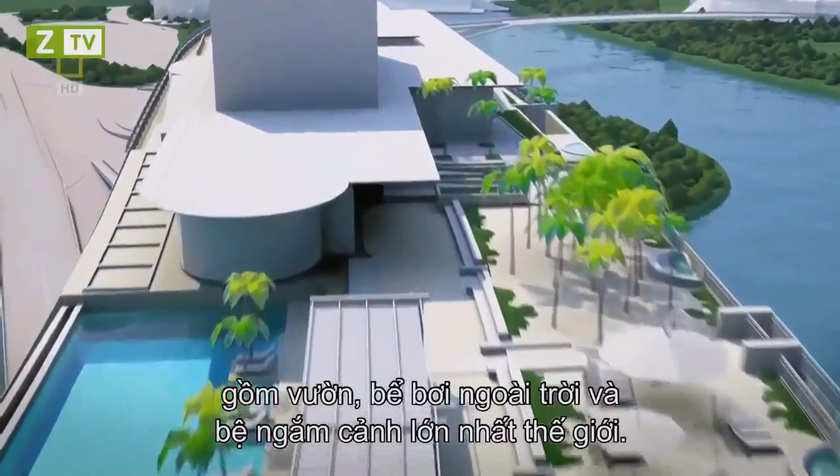A 340-meter sky park spans its length, containing gardens, outdoor pools, and the world's largest cantilevered observation deck. But how do you build something as big as an aircraft carrier, 200 meters in the air?

In the hotel's atrium, mammoth works of art have to be somehow incorporated into the architecture. Its challenging centerpiece, a 15-ton mass of steel by a renegade artist from Britain.

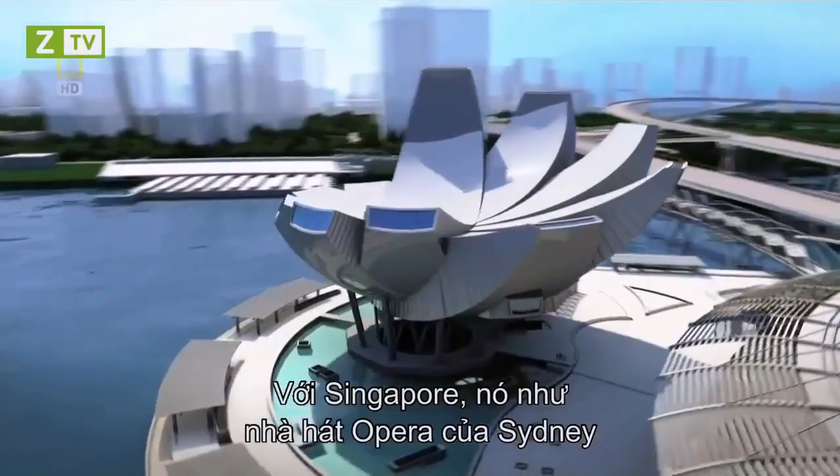A 60-meter-tall Art Science Museum is designed for maximum visual impact. It will be to Singapore what the Opera House is to Sydney. Only one problem: it seems too impractical to construct.

And a set of dramatic glass-encased pavilions, while themselves pose little challenge, have to be built in water.

The man behind the Marina Bay project understands the risks, but he believes that anything short of astounding will fail. Sheldon Adelson, one of the world's richest men and CEO of Las Vegas Sands Corporation.

What we hope to accomplish is to change the face of Singapore tourism. So we expect a very successful development. That is by far the largest and most expensive single project we've ever undertaken.

It'll cost about 5 to 5.5 billion US dollars. It's a lot of money. Now, I know $1 billion doesn't buy what it used to, but by any measurement, it's a lot of money today.

Adelson believes his huge investment is safe in the hands of Moshe Safdie, a world-renowned architect. Safdie is recognized for his use of dramatic curves and geometric patterns. The Marina Bay complex will be his largest and most difficult project yet.

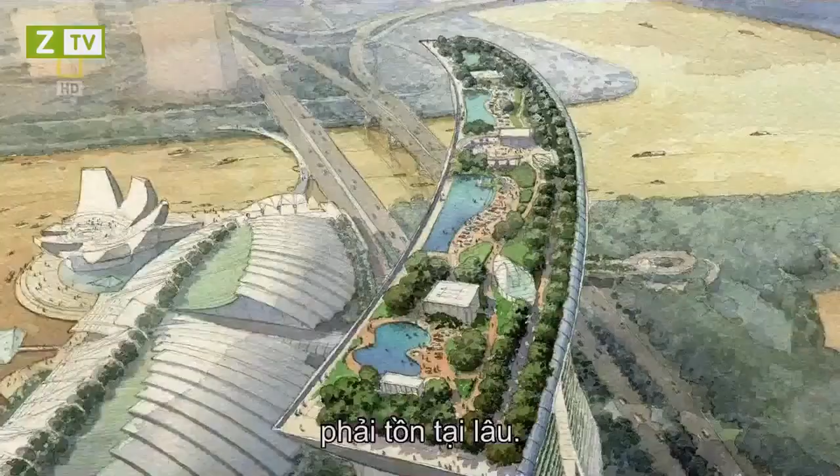I think that architecture has to be timeless. Therefore, what it espouses, what it provides, needs to be something that has a long life. What's unique about Marina Bay is all the pieces coming together.

You can't think about it as individual buildings. You've got to think about it as a piece of city. It's much more a symphony than it is a sonata.

On the ground, engineers are more concerned about the reality of building Safdie's vision. This is the North Retail section area. 30-year veteran John Downs is in charge of overseeing the entire project. The design is very, very diverse, and each component of the project is totally different from the others.

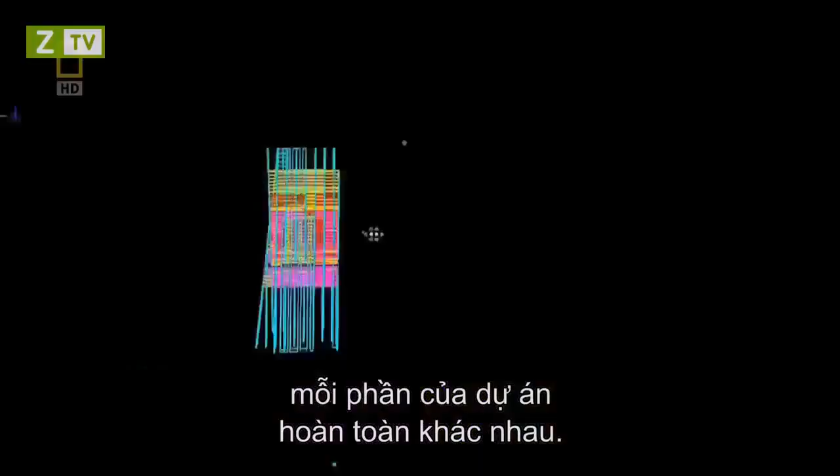For a project of this size, you'd expect with the planning, with the design, with the construction, you'd be expecting somewhere between 6 to 7 years. Here is basically a 3-year turnaround.

The first and most critical construction task is to secure the footprint, though this normally straightforward job proves otherwise, since the site was originally allocated for boats.

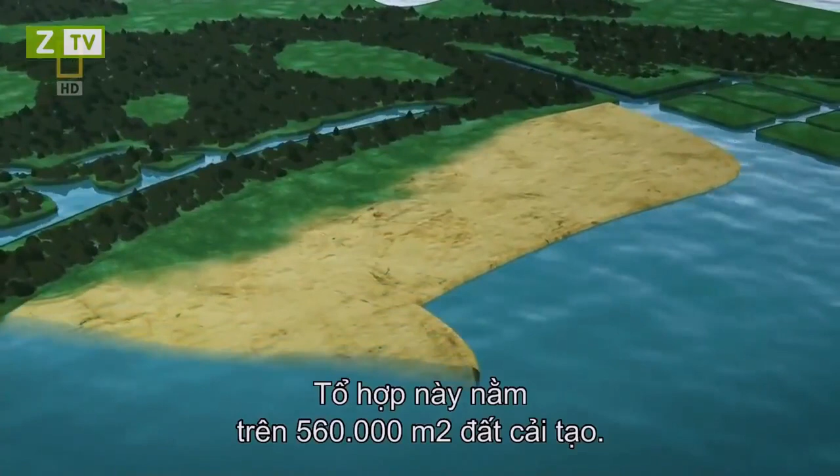The complex sits on 560,000 square meters of reclaimed land, part of a decade-long plan to revamp Marina Bay, a former saltwater estuary that's now a freshwater reservoir.

Beneath the reclaimed land, which is essentially a seabed, is a dangerous layer of marine clay, sometimes called black toothpaste. Marine clay has very poor structural properties.

If not given complete respect, the unstable marine clay is potentially fatal.

In 2004, Singaporeans discovered the lethal consequences firsthand. A routine excavation in an underground tunnel for the mass rapid transit network causes a collapse, creating a gaping hole in the Nicoll Highway, killing 4 workers.

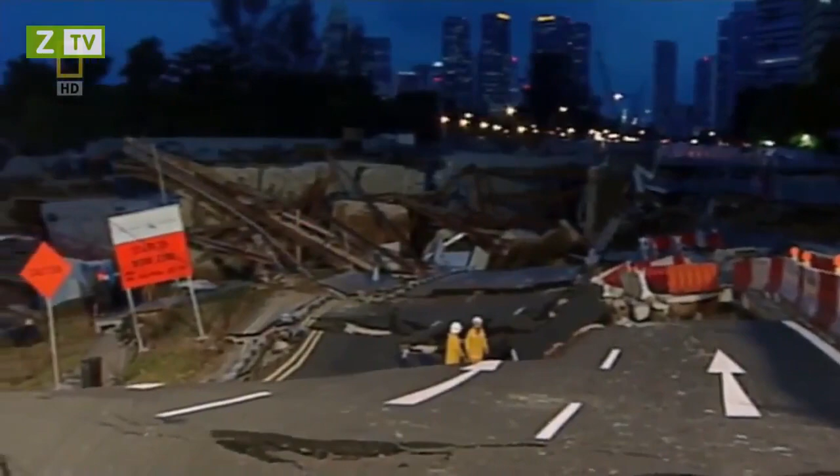The ground conditions in which they were building the Nicoll Highway were not dissimilar to those in which we are encountering here. They had also soft clay, they had similar depths of excavation between 20 and 37 meters. One of the big things that was learnt in the Nicoll Highway collapse was the importance of monitoring movements and the control of quality as the construction proceeds.

Marine clay is an old foe of engineer Mike Barton. He's defeated it in the past by understanding how it behaves.

The big problem with marine clay is that it is so soft that when you dig out the inside, the walls will move and potentially collapse and allow all the surrounding water in the bay into the excavation.

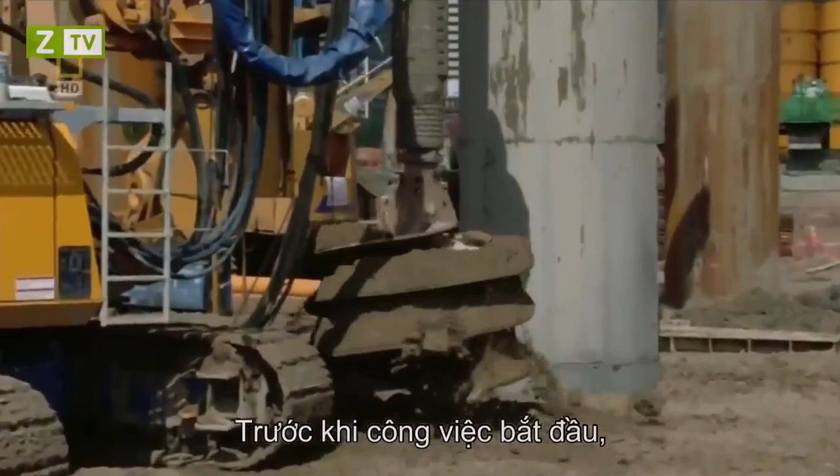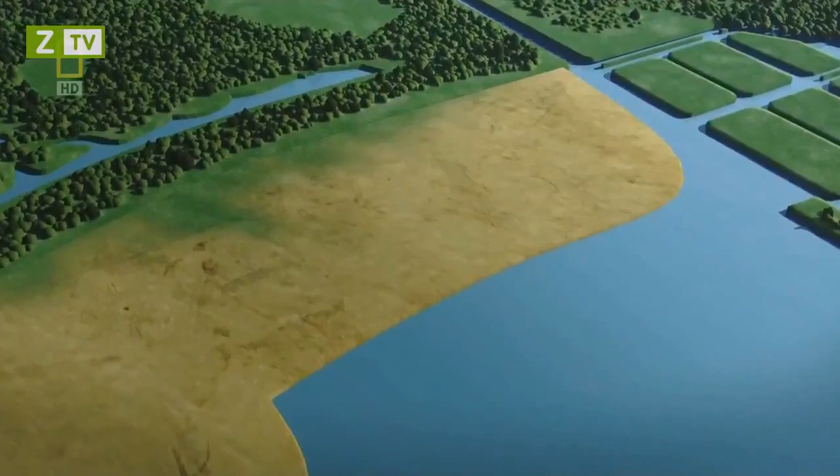So, before work can begin, the unstable building site needs major fortification. To combat marine clay, engineers decide to build giant concrete walls to create stabilizing perimeters for the larger buildings, known as diaphragm walls. Up to 1.5 meters thick, diaphragm walls are steel-reinforced concrete sections, pounded 50 meters into the ground.

They form watertight enclosures for men and machines to work round the clock. In just 1 year, over 4,000 meters of diaphragm walls help produce a rock-solid foundation.

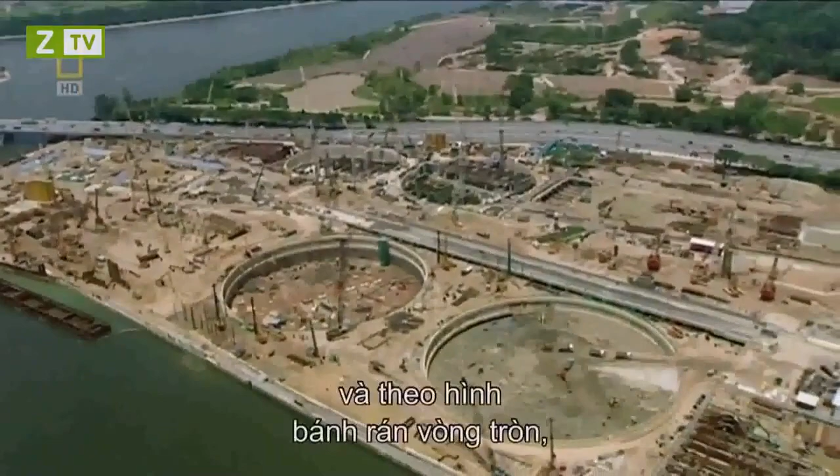The diaphragm walls that we constructed in a formation which we called a peanut formation, which is 2 circles joined together, and a donut formation, which is circular, are able to withstand very, very large forces from the marine clay without any movement. They encapsulate an area that's bigger than a football pitch that enables us to excavate very quickly and to build structure up very quickly.

Securing the footprint of the Marina Bay project has already taken a year out of John Downes' schedule. He now faces the difficult task of erecting the resort's many buildings in a space of just 2 years. Just managing the whole logistics of that, including the construction methodology, is very, very challenging for us.

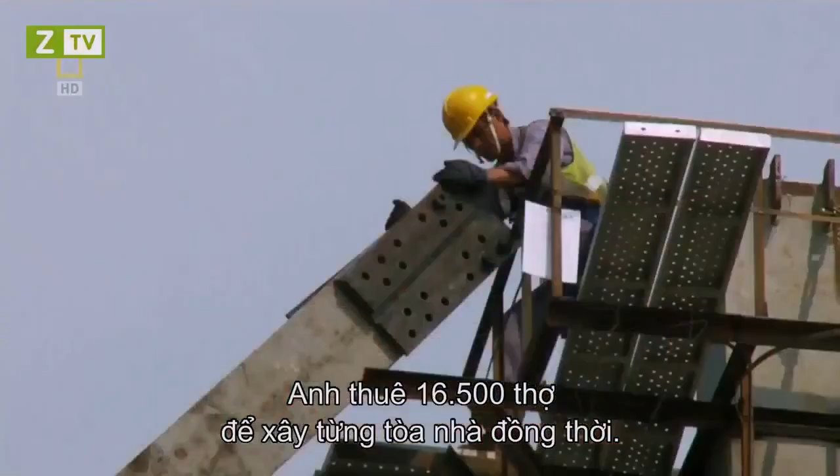To meet his tight deadline, Downes chooses the most direct solution. He hires 16,500 workers to construct every single building, simultaneously. It's like leading a small army, so organizational excellence is key.

We're just on the edge of Singapore in the CBD here, so rather than lose the contractors and the workforce to go off-site, we built our own 3-story project office. We have all of our contractors, our subcontractors here, we house our resident site staff, we have our project management team, we have our construction management team, our design management team, and the logistics here.

The tight schedule also creates problems at the hotel towers, where engineers are already struggling with a congested site. The important thing to do is to make sure that they come in and deliver the goods straight away and then get out again. We don't want too many vehicles on site at the same time.

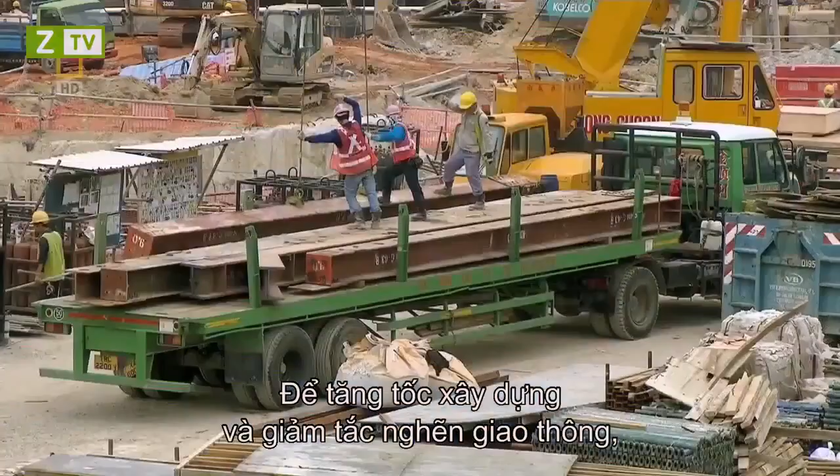To speed up construction and alleviate traffic congestion, engineers turn to a method that's proven itself countless times in the field: in situ concrete casting. Hotel walls are made on site in the thousands. And workers laying the floors are so proficient, they produce one floor per 4-day cycle.

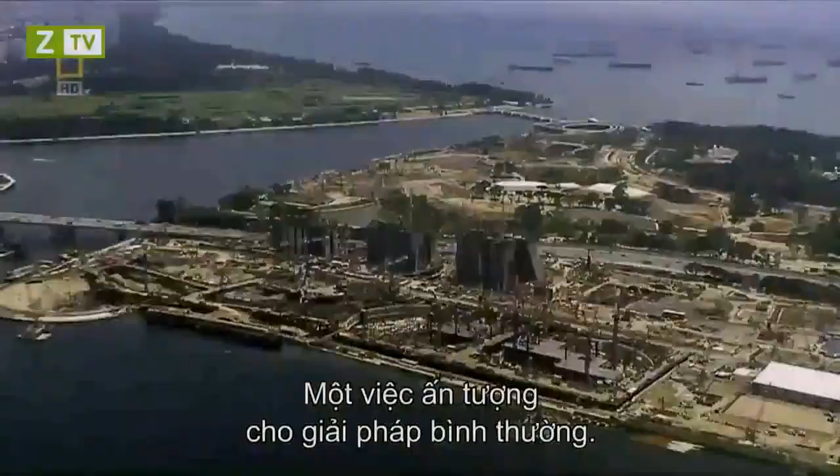It's an impressive display for a conventional solution. But the structure they're attempting is anything but conventional. The key challenge of building the hotel towers is its unusual design. Unlike other skyscrapers, part of the towers slope at incredible inclines.

Like a set of collapsing dominoes, the towers could buckle under their own weight if a practical building solution is not found. It's a major concern for engineer Craig Glover. I've been in the industry for 25 years, done a wide range of projects in many different countries, but nothing compares to this whatsoever. There was nothing we could take reference from across the street on the next high rise or across town. This is a new frontier.

Costing a staggering $5.5 billion to build, the Marina Bay Sands could be one of the world's most expensive mistakes if engineers can't solve the tower's problematic structure.

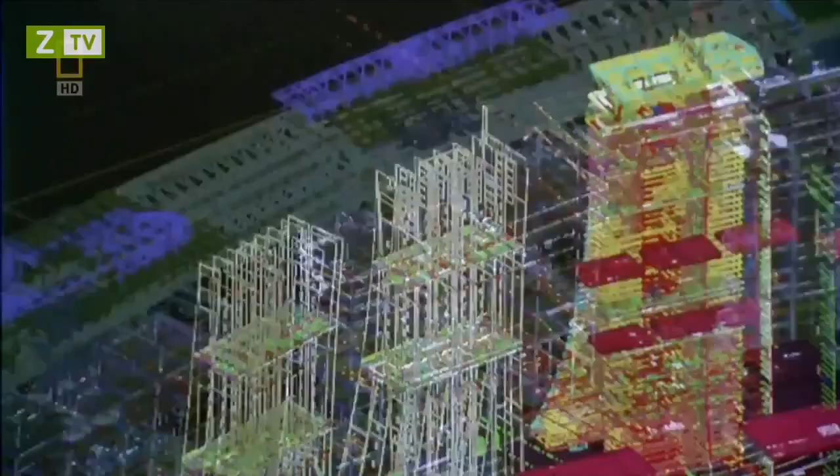Engineer V.C. Cheong leads the design team, and their solution comes out of left field. If you look at the configuration, it's not a straight tower, it's with a sloping leg. So all this sloping leg actually is, inducing a very huge external force onto the structure. We kind of built it without any support, so we actually formulate a solution to prop up the sloping edge.

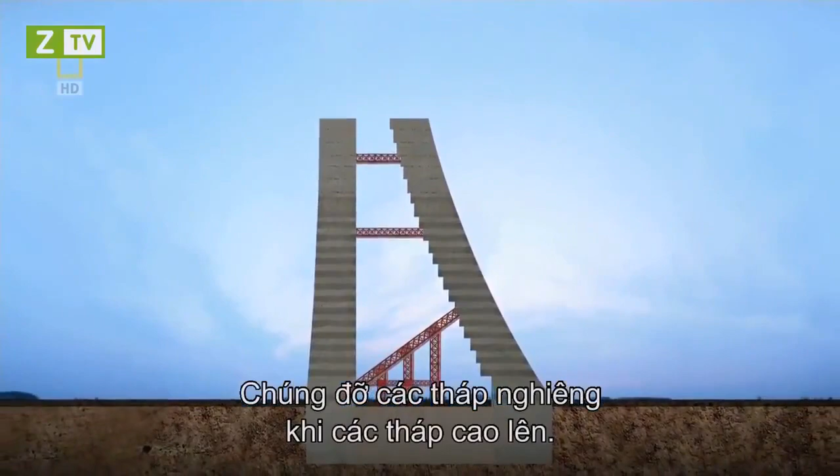Using a technique they've never employed before, engineers build large temporary struts made of strong structural steel. They prop up the sloping towers as they rise. Like a suspension bridge, high tensile steel tendons, also known as tension cables, give an added layer of support inside the walls. In theory, both the struts and the tension cables are temporary and will be removed once giant link trusses connect the towers at the 23rd floor.

The sheer weight in concrete is enough to topple the towers at level 8 if the engineer's calculations are wrong. To reduce the chances of failure, Glover and his team make a radical decision.

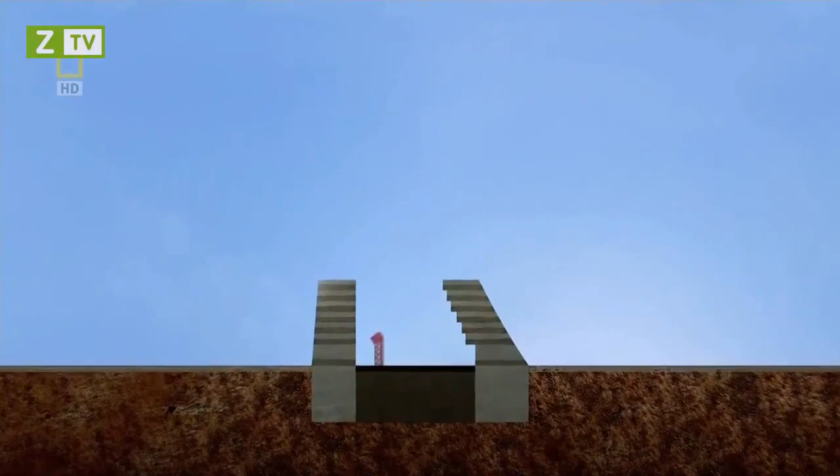Instead of removing the temporary tension cables in the tower walls, they make them permanent supports. I feel good it's in there because it's added strength, it's added support.

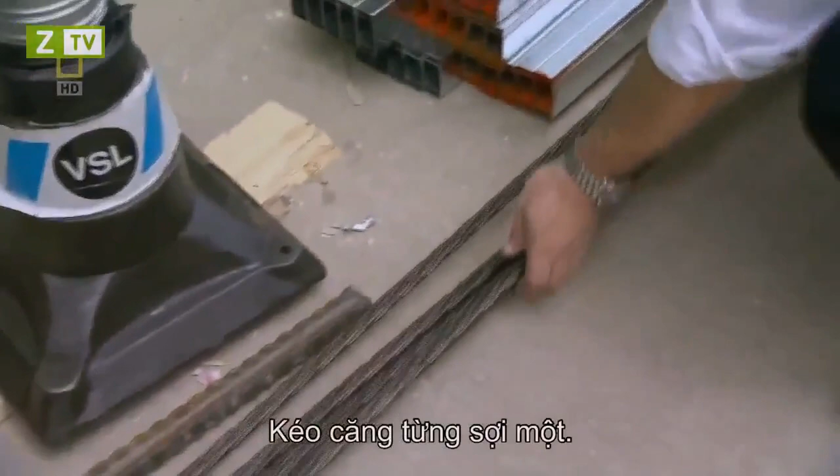We have a twined network here of high-strength steel. And what we do is we bundle these up so they form a cord with multiple strands inside this conduit. We place this conduit inside the walls prior to casting the concrete. So what we then do is once the concrete is cast, we anchor one end into the concrete. We then put a very high-strength pneumatic jack onto the collar and one by one pull these strands through and tension them up. What that does is basically pull the building back and hold it in place.

If these cables were to suddenly break or if they weren't in place, we wouldn't be able to control the self-weight as we build more and more of the building up.

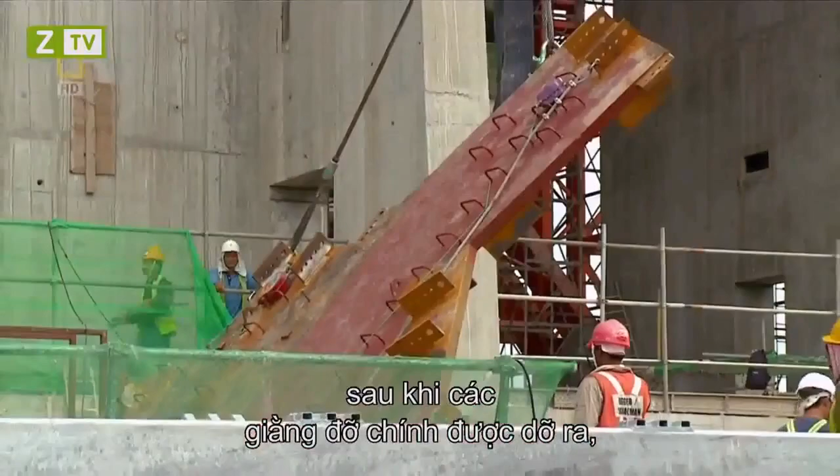Despite the team's quick thinking, the true test of their engineering decisions will only happen once the main support struts are removed and the massive link trusses installed. Link trusses are huge reinforced steel brackets that bind the towers at the 23rd floor.

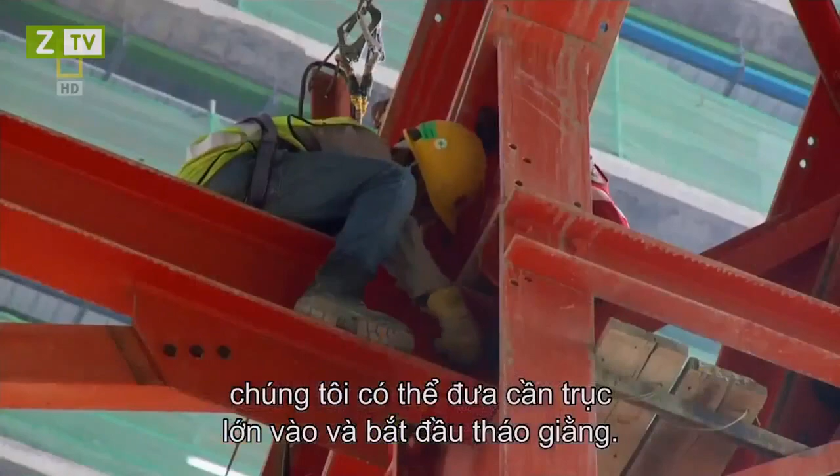Once their installation is complete, they transfer the sloping tower's weight completely away from its temporary struts. Once we're satisfied that we don't have any stability issues, then we can bring the large hydraulic cranes in and member by member start to dismantle the struts. We've got a lot of time pressure, so we've just got to make sure that these things keep moving.

As the last pieces of support struts leave the site, Glover and his team can finally breathe a sigh of relief. The link trusses are holding the building load. So far, so good.

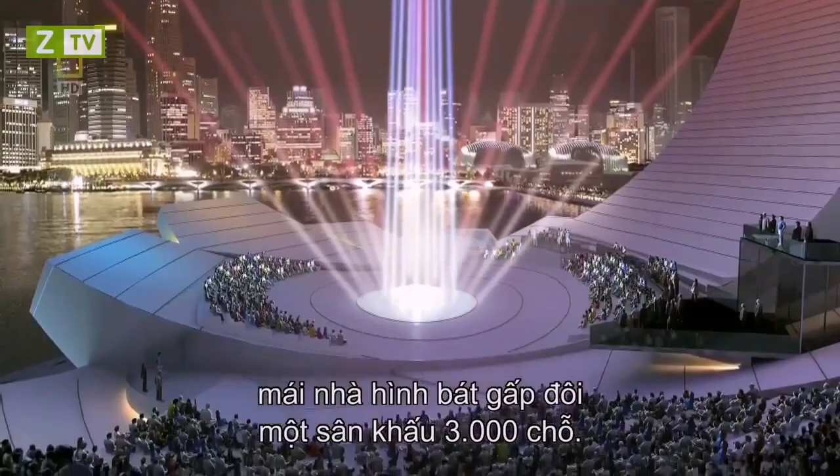Not all the structures have ended up according to plan. The 60-metre-high Art Science Museum is facing a major design overhaul. Planned as a venue for blockbuster exhibitions on the arts and sciences, its bowl-shaped roof doubles as a 3,000-seat amphitheatre. Unfortunately for engineers eager to start its construction, architect Moshe Safdie isn't happy with its current shape.

Somebody looked at them and said, looks like a bunch of bananas. In fact, Mr. Adelson said, looks like a bunch of bananas. I said, well, if they look like a bunch of bananas, we're not there yet.

It's terrible news for Safdie's design team, especially its principal, Gene Dyer. There are times that Moshe will come in with an idea. We think it's quite exciting. We'll pursue the idea for weeks or even months. He'll come back and say, I want to change the idea. And we've already bought into the idea, so it's a bit frustrating.

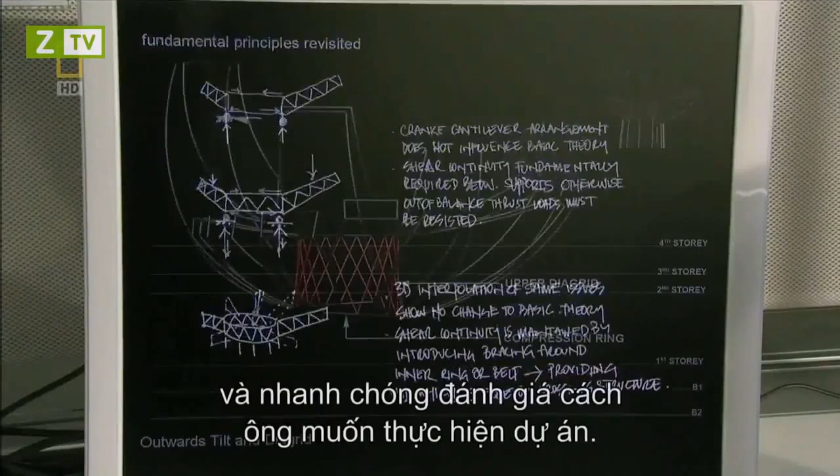To rework the unique geometry and dimensions of the Art Science Museum, Dyer and his team turned to advanced 3D modeling programs. It not only makes navigating the museum's complex geometric patterns easier, it shortens the process to a matter of days. The model is dynamic and it can be moved by just changing one or two elements. Moshe could experiment. He could make rapid judgments in a very short period of time about which way he wanted to take the project. This is a process that was impossible to do 10 years ago. Without the computer, this would take years and years and years.

After months of refining the design, Safdie is finally happy with the result. The mathematical precision that we gave them made them even more beautiful. It led some people to say, well, hand of welcome. Others said, is that a lotus? And the more ambiguous the associations, the closer I thought we were getting to our target. Because I think the least exciting buildings are those which have overt symbolic associations.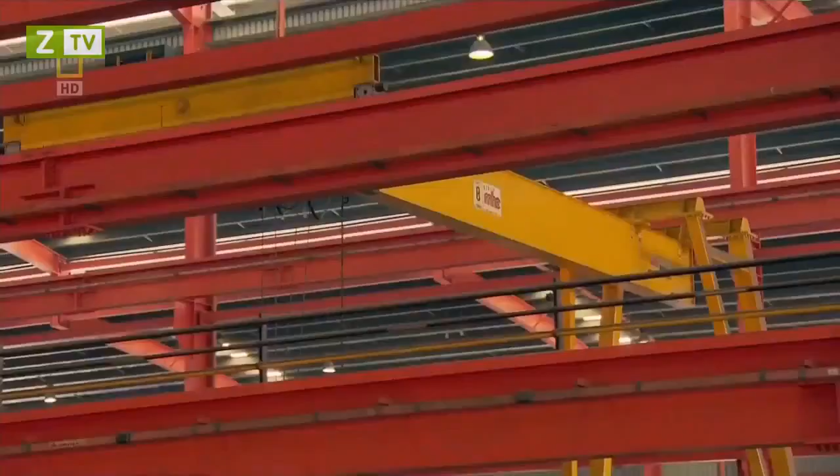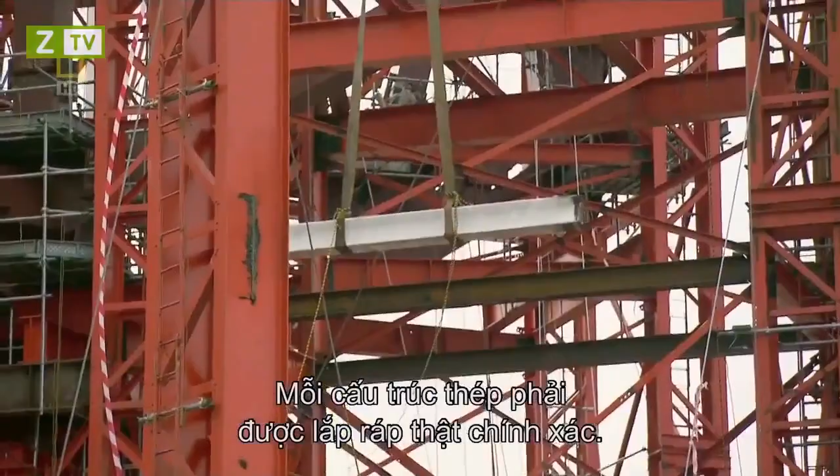Armed with the new design, engineers begin work on the museum's 60-metre-high superstructure. A staggering 5,600 steel elements, weighing some 5,200 tons, are prefabricated to exact specifications. They are then trucked onto site and assembled. It's like putting together a giant jigsaw puzzle. Each element has to be installed with pinpoint accuracy. If it's even a few millimeters off, engineers will have to start from scratch.

Engineers of the massive atrium at the base of the towers are facing an equally tough construction process. Safdie has come up with a challenging design. He wants to inject art into the atrium's architecture, so that visitors will feel like they're walking through a grand Gothic cathedral.

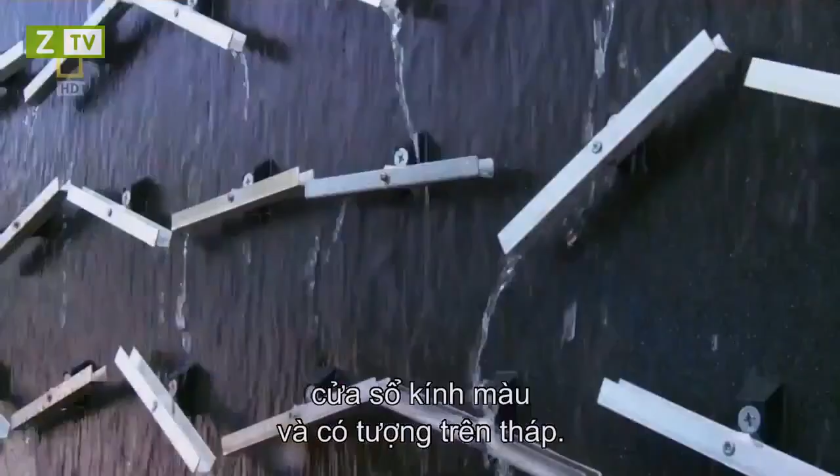In medieval times, if you think of a Gothic cathedral, there's the architecture, there's the stained glass windows, there's the sculptures on the pinnacles. You cannot draw a line and say art and architecture. Art and architecture are one, they're singular experiences. And I think what we try to do here is come back to this integrative mode.

To create the centerpiece of his vision for the atrium, Safdie commissions renowned British sculptor Antony Gormley. Famous for his unusual approach to art, Gormley is the brains behind the Angel of the North sculpture in northern England. What he's about to attempt is proving to be more of a construction challenge than an artistic one.

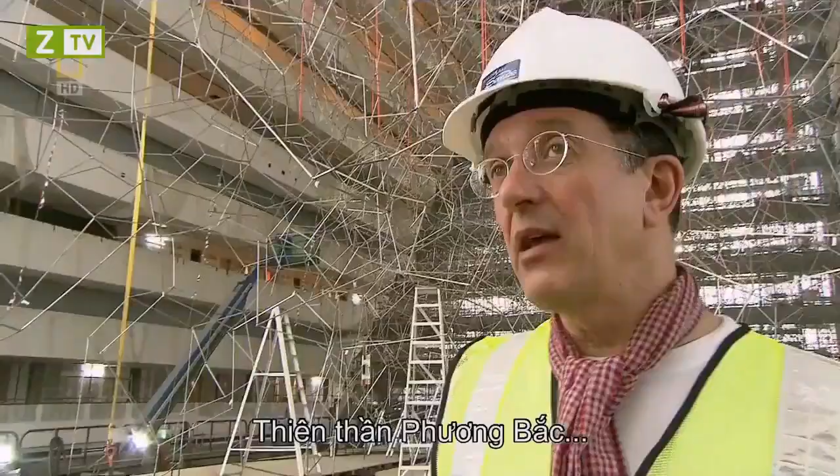A cloud-like sculpture some 40 meters long, made up of 15 tons of high-grade stainless steel, hung 12 stories above the atrium. The Angel of the North is, in a way, making a very traditional public sculpture because it's isolated in space at the edge of a valley. You can see it for miles and miles. It's very much about occupying space. This is about activating space.

But just as they're about to begin construction, a bombshell drops. September 2008. A global financial crisis wreaks havoc on markets. The flow of the hundreds of millions of dollars that keep the Marina Bay project going every month suddenly stops.

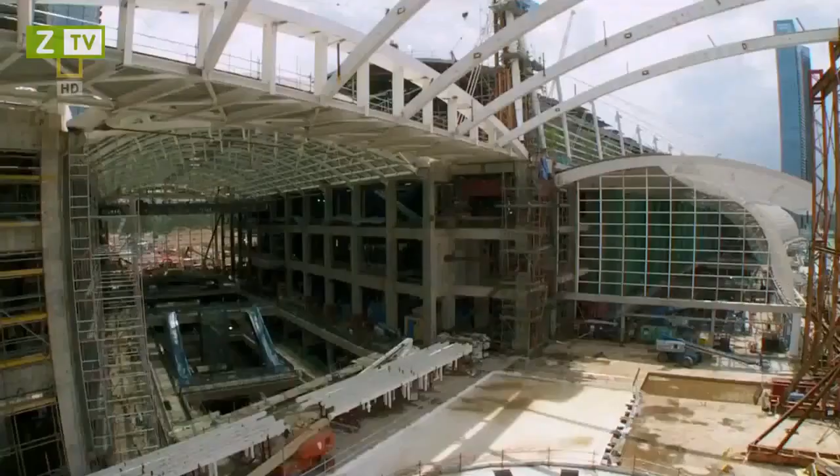For engineer Matthew Pryor, it's a massive blow. I feel devastated. I mean, it couldn't be worse. Probably the worst day of my life professionally. There's no more money coming through. So unless we put some funding in place or there's something, we're going to have to shut the jobs down. It is a tough decision to be made, and we don't know what we're going to do just at this point in time.

With the future of the multi-billion-dollar project plunged into doubt, all eyes turn to the man behind it, Sheldon Adelson. The next move of one of the world's richest men will determine the fate of the mega construction site.

The 2008 global financial meltdown is a haunting echo of the 1990s Asian crisis. Back then, progress on Shanghai's World Financial Center came to a complete halt for 5 years. For Adelson, that's simply not an option for the high-profile Marina Bay resort. His vision of changing the face of Singapore tourism is at stake, and so are billions of dollars of investment from his Las Vegas Sands Corporation.

He prefers finding a stopgap solution to weather the storm. Throughout history, there has never been a trend that went straight up, nor a trend that went straight down. So it goes up and down. It's only a matter of time when things will recover.

In a bold move, Adelson pledges his vast personal wealth to the completion of the project, effectively ending any speculation of failure.

There's a massive sense of relief in the company. Everyone's pleasantly surprised how quickly we've got through this, and the fact we could hold it together and get it going again. So euphoria is probably the best way to describe it.

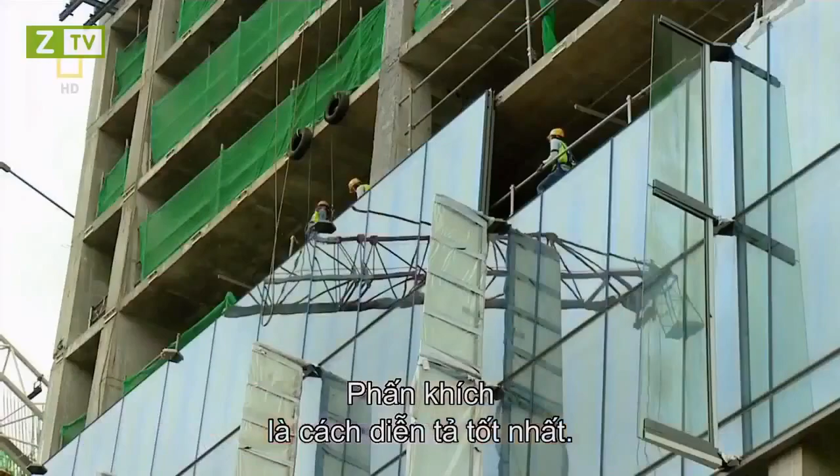With the crisis averted, construction on the three 57-story hotel towers, the casino, theatres and convention centre resumes at pace. Everywhere you turn, steel is being installed. It's vital reinforcement for every concrete structure on the 15.5-hectare site.

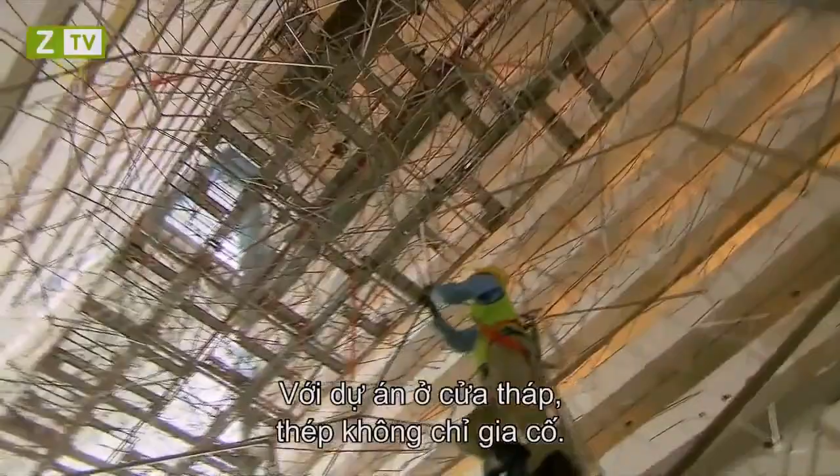For one project at the tower's atrium, steel is more than just reinforcement. To construct the 15-ton drift sculpture by British artist Antony Gormley, engineers had to first laboriously prefabricate it into over 70 segments.

The segments are then welded into 8 slices and will ultimately form the sculpture. It's a tricky operation, but engineers are able to complete it swiftly due to a system of codes and numbers that enable them to quickly identify what goes where.

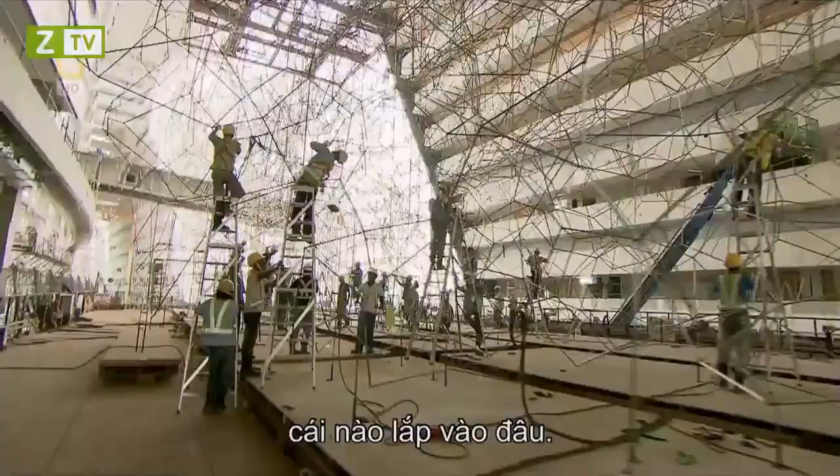Once all 8 slices of drift are fully assembled, it's lifted up into position by a temporary lifting frame. A massive box truss on the atrium ceiling then takes over the load. In theory, the box truss will support the weight of the lifting frame as it's being lowered down.

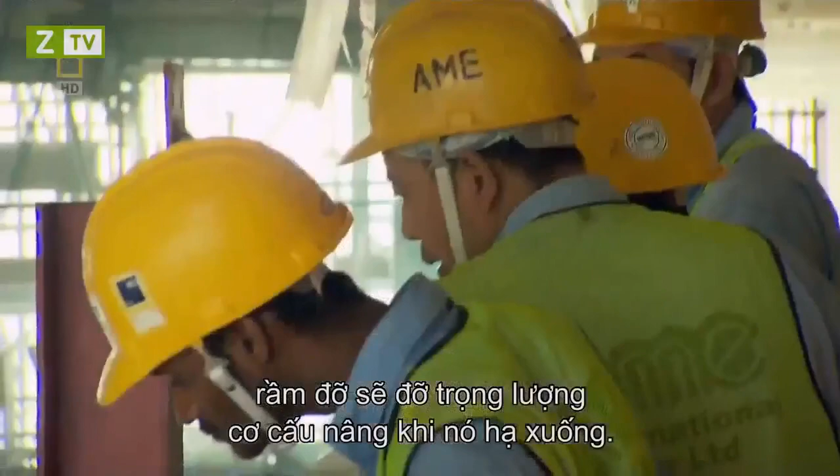It will be a heart-stopping moment, especially for engineer Graham Stevenson. The lifting frame is about 9.5 tons, so when it picks up and gets some momentum, there's a potential that it just wants to flick over and rotate through its full 90 degrees, and we won't have it under control.

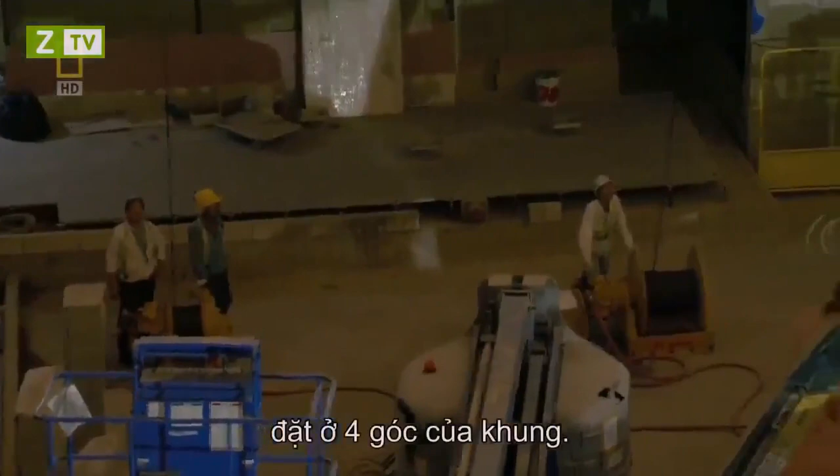Stevenson's solution: 4 powerful automated hoisting drums located at the 4 corners of the frame. They allow workers to control the strength and speed of the operation with high tensile steel cables. A spotter at the top determines the pace of the procedure and marshals the team.

The entire operation is estimated to take up to 10 hours to complete. As soon as the frame is in motion, there's no turning back.

Midway through the lift, Stevenson receives reports of a potential problem. 22-story, number 7 temporary cable, scaffolding touching the cable. The temporary cable touching to the transverse. Is it just the end of a tube? So you can just cut the tube? Yeah.

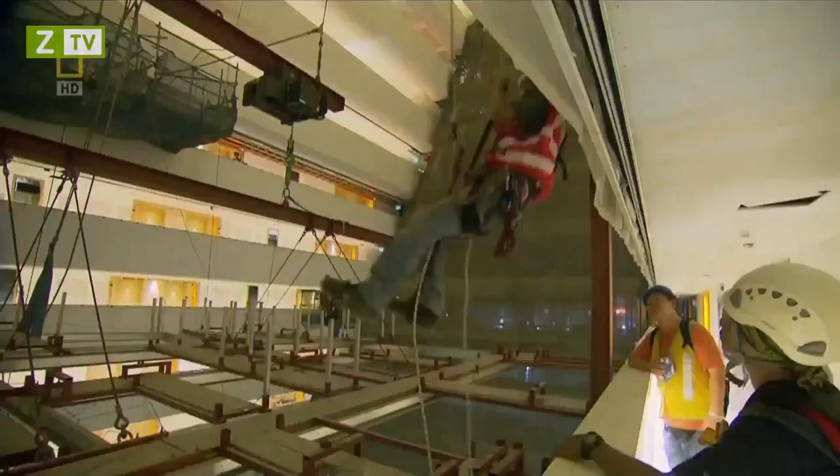Problem solved. But what was previously an estimated 10-hour procedure now turns out to be a 24-hour marathon lift.

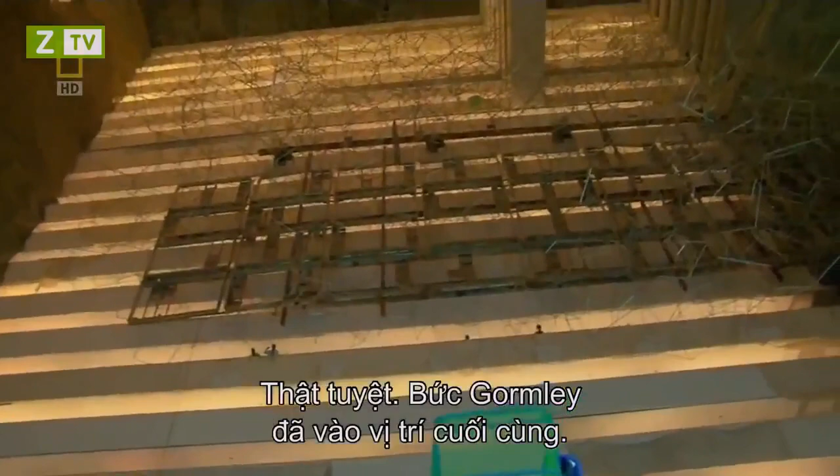At 6 a.m. the following morning, they complete the job. Absolutely fantastic. The Gormley is now finally in its final position, so really an end of a long and exhausting day, and big thanks to everybody, but it's finally done.

While the drift settles into its new home at the hotel atrium, elsewhere attention is focused on one of the project's key features, the crystal pavilions. The two glass-encased buildings by the promenade are set to be the resort's premier shopping and entertainment complexes.

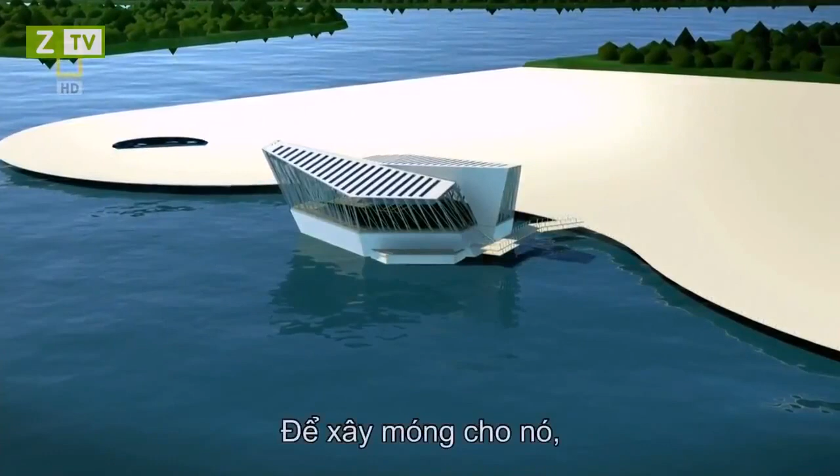But before engineers can make them a reality, they have to secure their footprint. And already a major obstacle threatens to sink their objective. The crystal pavilions are situated within the confines of Marina Bay, so to found it, engineers have to find a way to build in 6 meters of water.

The responsibility of tackling the problem falls on the shoulders of engineer Kurt Vella. I'm from Sydney. The underlying foundation in Sydney is sandstone, it's rock. All you need to do is just dust off the surface and you can build skyscrapers on it. Here it's very different. All the structures have to be heavily founded.

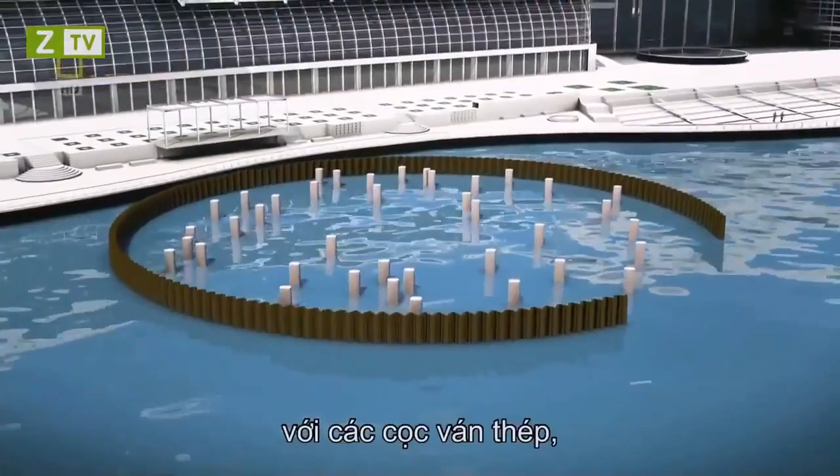To keep water out of the construction site, only one solution seems viable for Vella and his team: a waterproof steel structure called a cofferdam. This temporary formation surrounds the worksite with a circle of steel sheet piles, creating an impenetrable shield that locks out the water, keeping the workers safe within.

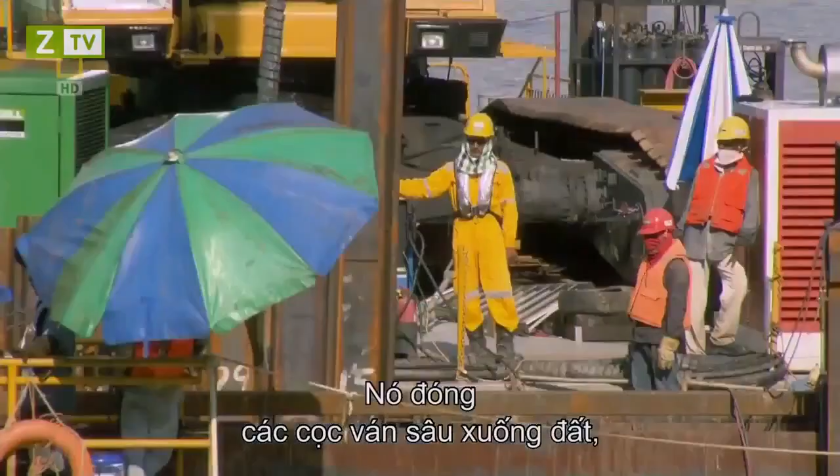For the job, they rope in a 12-ton vibro hammer. It punches the sheet piles deep into the earth, making the cofferdam rock solid and resistant to movement.

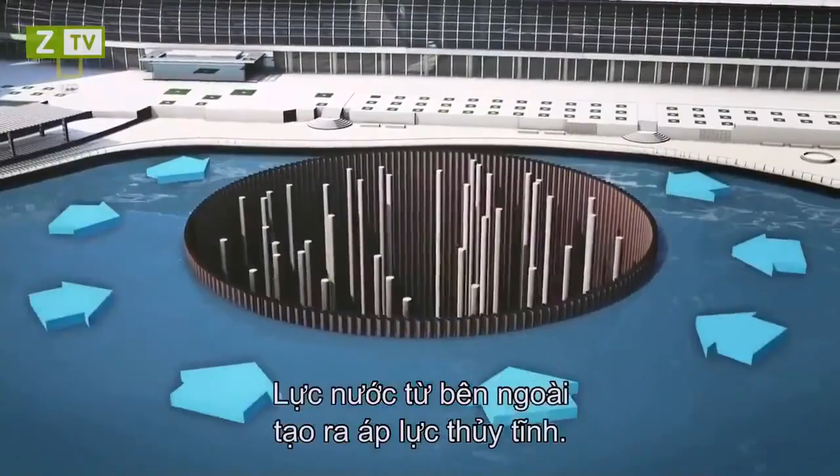With the cofferdam secured, engineers deploy powerful diesel pumps and run them 24 hours a day, ejecting any water that remains within the walls. This last step comes with inherent dangers. The force of the water outside creates what engineers call hydrostatic pressure, powerful enough in theory to force water through any gaps in the cofferdam.

It's something that Vella prays will not happen. There's a bit of hesitancy and concern because we've got to build this building in the middle of Marina Bay. Everybody can see what we're doing, so if it leaks, it's a problem. If it fails, if it moves, if it collapses, it'll be an absolute catastrophe.

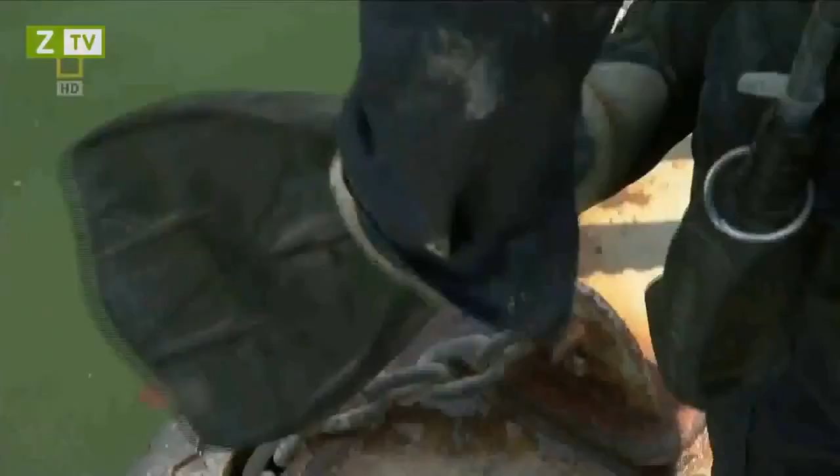After a day of pumping, Vella's worst fear comes true. Parts of the cofferdam are leaking. To rectify the problem, Vella orders a team of 8 divers into the water on 10-hour shifts. Their mission: find out where the water is being forced in and plug them shut with epoxy resin.

Anson Lee is an 8-year diving veteran. The toughest part of my job is the environment. The visibility is poor here. It's totally zero, I cannot see anything below. I solve that by feeling the suction and then feeling out the thing. You have to overcome all the fear that you can't see under the water. But I feel proud to be one of this team to build this thing out.

After 2 weeks of hard work by divers and the pump crew, the job is finally complete. After 2 years of battling the elements and overcoming difficult construction milestones, the 3 sloping towers of Marina Bay Sands can finally celebrate their topping off ceremony and move on to the next phase.

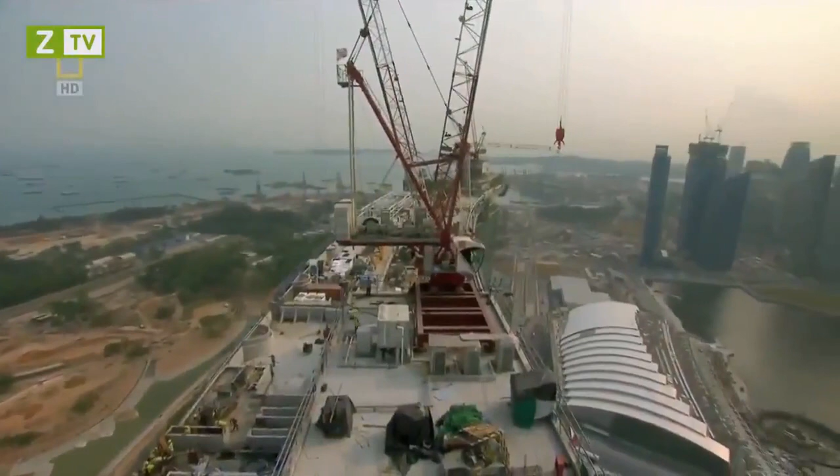But a destructive force of nature threatens to throw a spanner in the works. With climate change predicted to affect the pattern of Southeast Asia's typhoons, Singapore may one day experience the destructive tropical storms plaguing its northern neighbors in the Philippines and Taiwan.

When that happens, typhoon-force winds could spell disaster for the hotel towers, especially the 340-meter sky park sitting on top of it. The force of the wind can make both buildings sway dangerously, causing irreparable damage to the structures.

The Sky Park, offering 360-degree views of Singapore. The visionary design will have enough surface area to park 4.5 Airbus A380s.

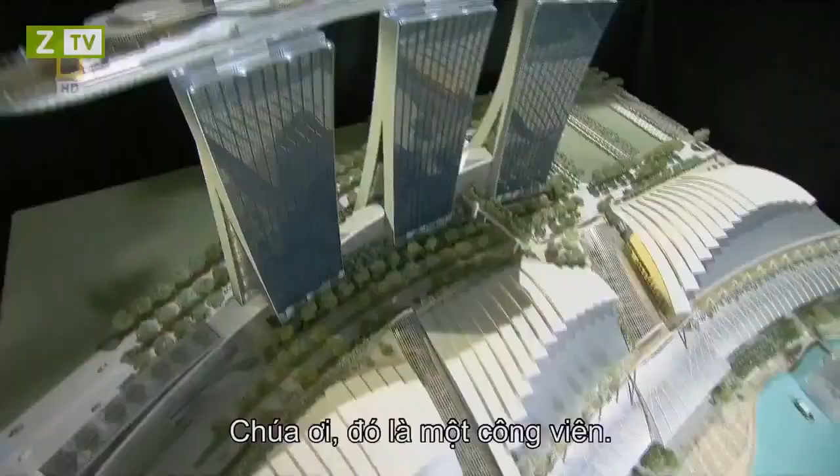But when architect Moshe Safdie first mooted it, it stemmed from a purely functional need. Luxury hotels, as we think of them, always have lots of open space around them, gardens, at least in the kind of tradition. But we didn't have much space left. And at that point, I figured, well, if we cut out of an extrusion of foam the kind of slab that goes over those 3 towers, and we placed it there, and we said, well, what do we have here? My God, that's some park. And so that's where the idea was born.

Safdie's revolutionary idea scores points for ingenuity, but it clearly isn't what nature intended. Typhoon-force winds threaten to rock the towers and its sky park, causing unimaginable damage. If engineers are to make the building a reality, they'll need a rock-solid solution.

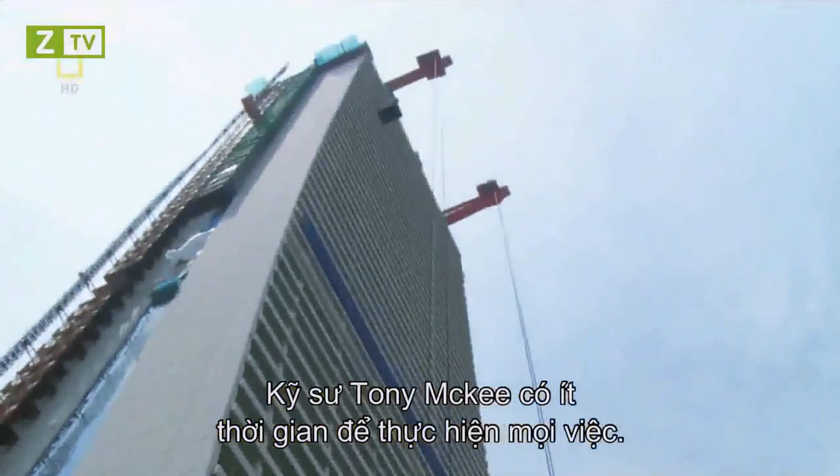Still got to do all this planning. Engineer Tony McKee has little time to make things happen. At the moment, we're running a couple of weeks behind what we'd originally planned. We're not entirely happy about it, but at the end of the day, we've got to do this safe and we've got to do it properly.

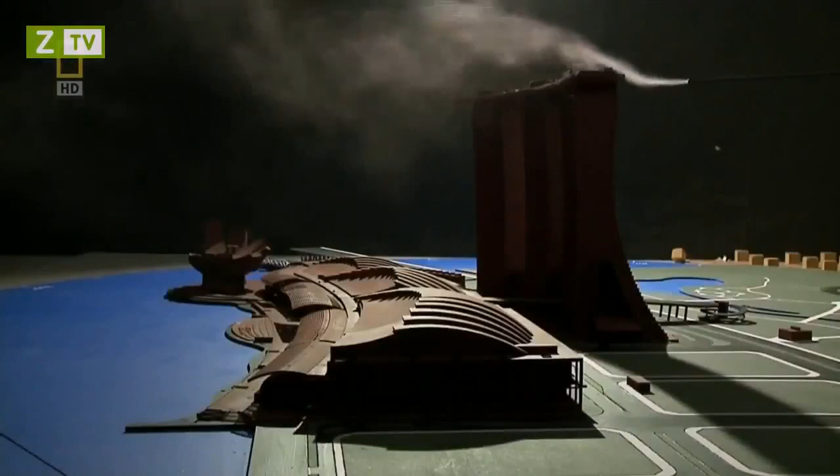To fight the enemy, McKee knows he has to first understand the enemy. He hires leading US wind engineers CPP to carry out extensive testing on the towers and sky park. Their mission: find out how Singapore's potential wind forces affect the buildings.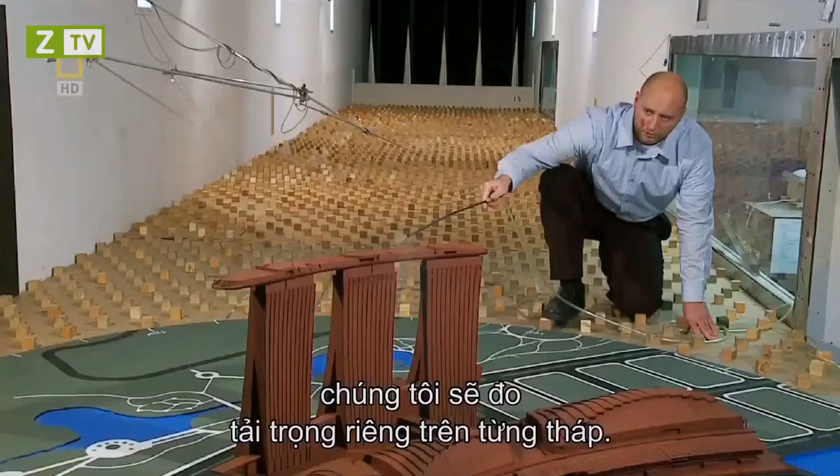Wind engineer Roy Denoon oversees the process at their state-of-the-art wind tunnel in Fort Collins, Colorado. The thing that makes this really special is the fact that we have this sky park running across the top, linking all the towers together. So whereas normally with a normal tower, we'd measure the loads on the tower in isolation, with this one, what we need to do is measure the loads on all 3 towers at exactly the same time. So that way we can know how the towers are going to move relative to each other, so we can make sure that they're not going to put excessive strains or movements into the sky park.

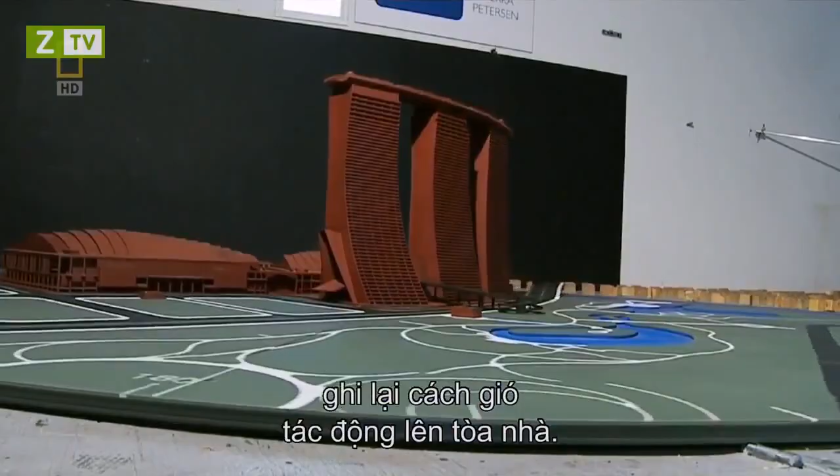During the tests, a scale model of the Marina Bay Sands towers is blasted with 40-kilometer-per-hour winds to simulate faster typhoon winds in reality. Over 1,000 pressure-measuring instruments inside the model register how the winds affect the buildings. At the end of the tests, engineers confirm that the 3 towers can deform by some 200 millimeters during the fiercest storm.

Engineers quickly figure out a solution: movement joints. Inspired by bridge engineering philosophy, movement joints are essentially gaps located between the concrete towers. The huge gaps allow for movements of up to 250 millimeters.

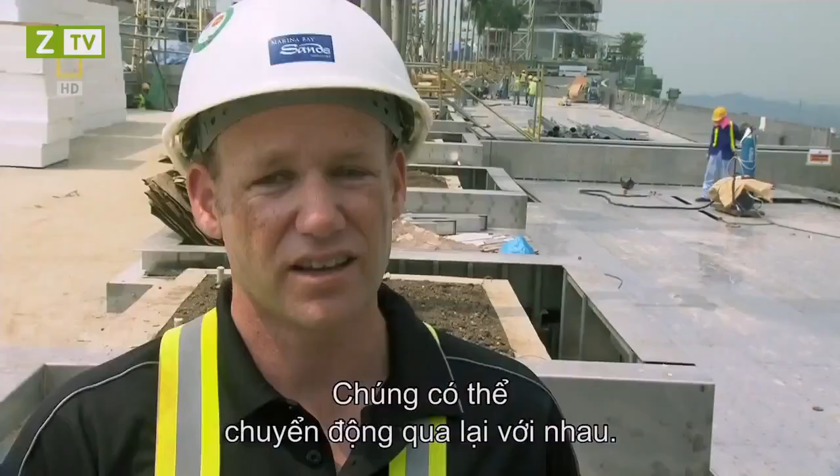Aluminium and stainless steel plates act as sliding components. They can move back and forward over each other, a little bit like you'd see in a flexible bus, where you have that articulation happening in the middle. It's a similar concept to that. To accommodate the differing movements of the 3 towers, engineers install multi-directional steel bearings below the sky park.

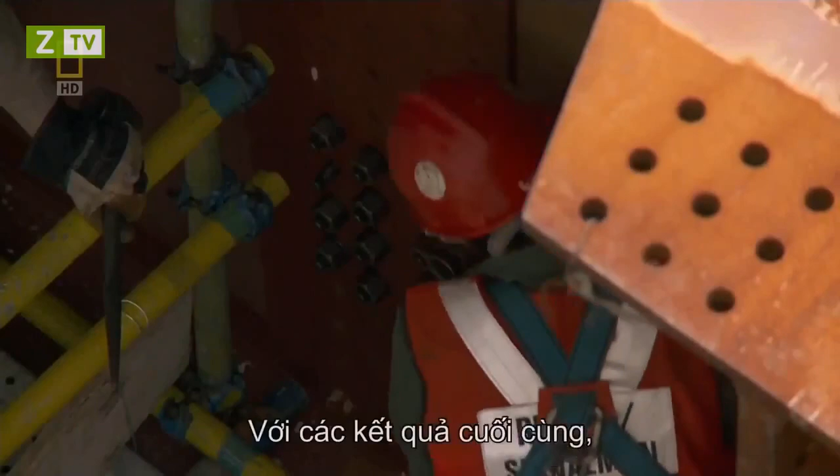Armed with the final results, McKee can now safely begin construction of the sky park. Consisting of some 10,000 tons of steel, the sky park is as big as an aircraft carrier. The most practical way for engineers to construct it is to break it into 14 segments on the ground before assembling it at the top of the towers.

There's no room for miscalculation at 200 meters in the air. Each segment is carefully prefabricated and tested by steel specialists Yongnam,

and then trucked to the site independently. From the very beginning, McKee and his team anticipate that their biggest challenge will be lifting the 2 largest segments of the sky park, the box girders. Measuring 80 meters long, their combined weight is a staggering 1,400 tons.

How do we feel? A little bit of apprehension. You know, it's a significant lift that hasn't been done before. If something goes wrong, it could be really significant for us.

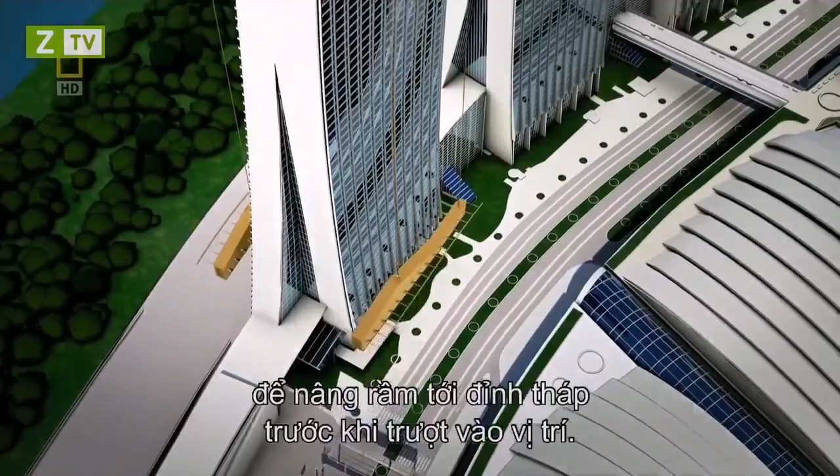To reduce risks, McKee turns once again to proven bridge building technology. In a process known as strand jacking, giant temporary lifting gantries made of strong structural steel will use powerful hydraulic jacks to lift the box girders up to the top of the towers before sliding them into place. It will be the longest and largest lift of its kind in the world, and McKee needs the best in the business.

He puts a pioneer in the field in charge: Swiss-French company VSL. Engineer Eddie King and his team have successfully raised bridges, stadium roofs, and even Ferris wheels.

The toughest part of my work is you have to plan everything very precisely, because everything is set up in millimeters. So we have to lift up and slide it in and position it within 5 or 10 millimeter accuracies. If we don't do it properly or don't do it safely, the biggest hazard is the thing can fall down to the ground.

Other factors further complicate the lifting process. Due to an increasingly tight schedule, the team is forced to conduct the lift during Singapore's annual monsoon season. It's almost impossible to predict when a tropical storm will hit. When it does, the accompanying lightning strikes can endanger lives.

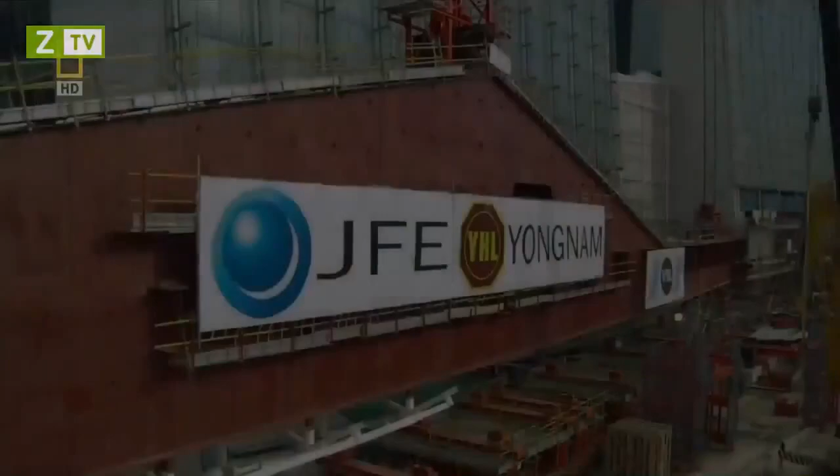Because the whole operation takes place meters from a jam-packed highway, curious onlookers will be able to see any mistakes the engineers make. It's a potential public relations nightmare. Okay, now I stop now.

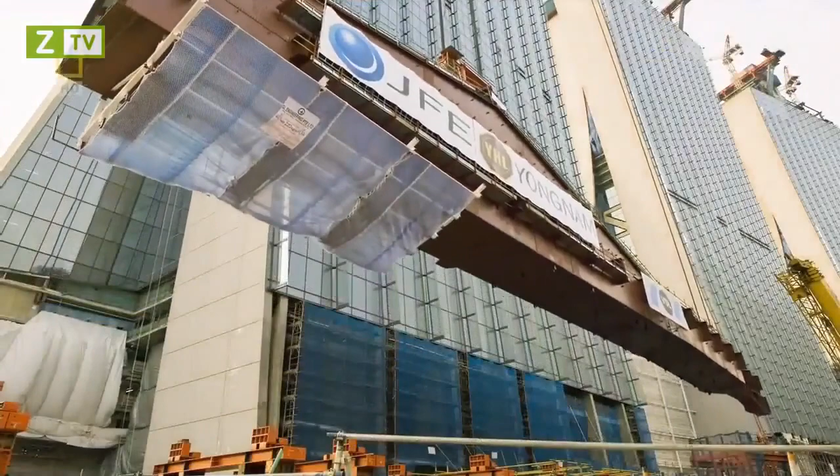During an estimated 16-hour lift, the box girders will move at a cautious 14 meters per hour. Eddie King and his team constantly check their weather gauges for any incoming storms. The hydraulic jacks are also inspected regularly for overheating. No one wants the operation to stall in mid-air.

Point 1 to point 4. 288. This one, change to channel 2, yeah?

Despite the team's best efforts, Mother Nature catches them by surprise. Okay guys, rain is coming. It's better we stop here.

An approaching downpour threatens to grow into a lightning storm. We are at 200 meters above and the surrounding buildings are quite far away, so there's a chance of lightning striking a high point like this. So we've got to stop and wait until the weather gets better before we continue our lift.

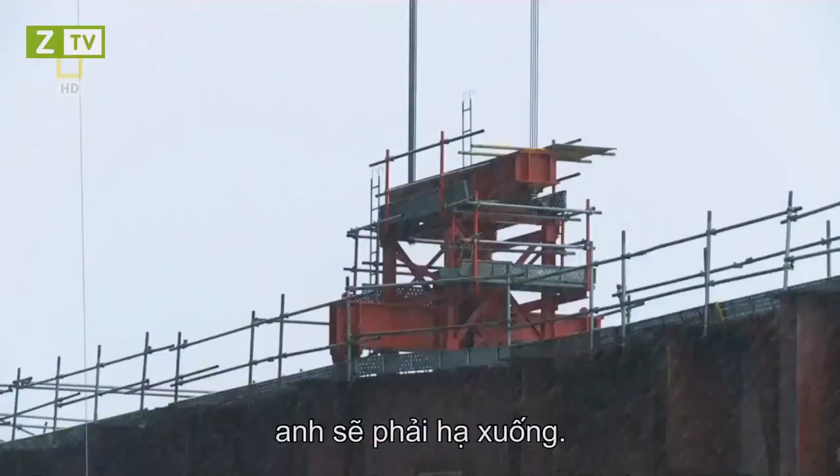McKee's worst fear comes true. If the girders remain stuck at midway for too long, he will have to order them down. Okay.

After a tense 3 hours, the lightning threat passes, and the operation cranks back to life. By the time the box girders slide into position, it's past midnight. Everything went quite smooth today, so we hope tomorrow we can do the same.

With the lessons learned from the box girder lift, the rest of the segments go up smoothly. As the final piece rises into place, Singapore is already marveling at the team effort behind one of the world's most ambitious building projects.

In just 3 years, engineers overcame seemingly impossible construction challenges, defeated marine clay, engineered ingenious design solutions, and survived the most debilitating financial crisis since the 1930s. As the finishing touches are put on the resort, the stage is set for an opening party, Singapore style.

Those involved reflect on the project that has already far surpassed their expectations. It's a bit kind of overwhelming, you know. I'm in the process of disconnecting the umbilical cord. It's not easy for an architect.

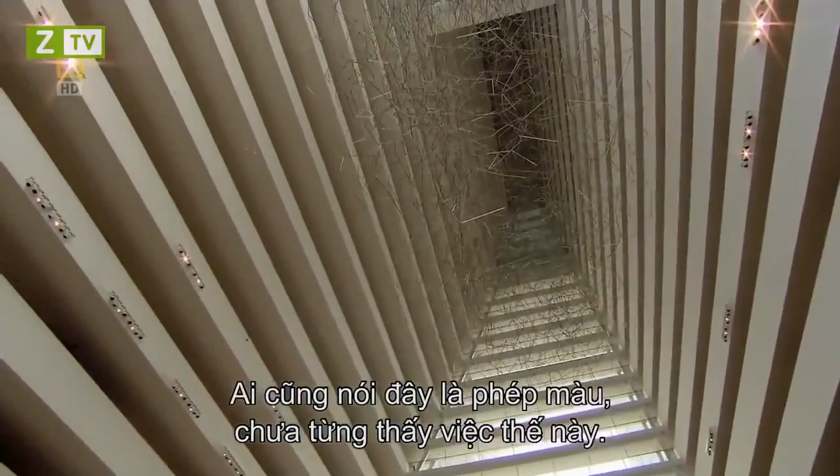This type of project probably only comes around every 25 years or so. So it's been a lot of hard work, extremely challenging. I really can't imagine, I couldn't list the number of challenges we've overcome along the way to get to today. Everybody is saying this is kind of a miracle, you know, never seen anything like it. And it's rewarding, it's nice.

The Marina Bay Sands, Singapore. Proof that with visionary design and engineering know-how, megastructures can still defy the odds and fulfill the wildest dreams.